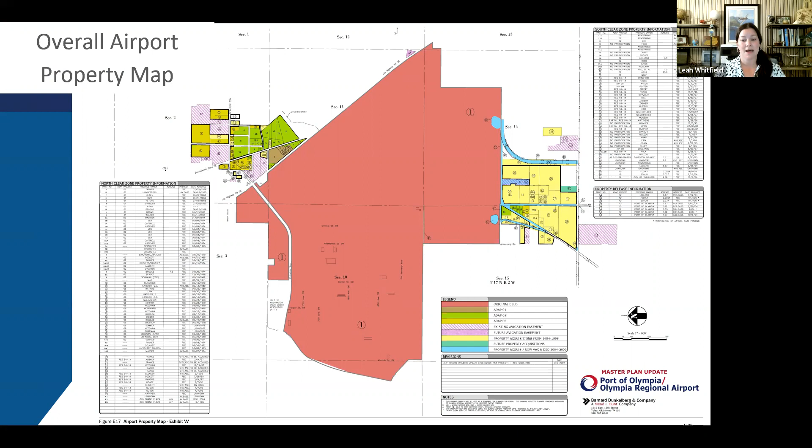So from a big picture perspective, this is the airport's property. This is the airport property map from the last airport layout plan, and any of the areas shaded in any of these colors are owned by the airport. So the overall property boundary includes all of this land. However, as you'll see on the next slide, we're really only focusing on a portion of that.

And so if you look at the screen, it's outlined in red. This is pretty much from, so at the bottom of your screen is the west side of the airport. And that's Newmarket Street. So we're looking at Newmarket to the east. So while the area that the port owns, or the airport owns, to the west of Newmarket Street is very important to the overall self-sufficiency of the airport, the airport master plan is really focused more on the airport proper, so the actual airfield and the surrounding land that supports the airport and those aviation operations. So just wanted to give you that focus area of where we're talking, so that way you're not curious as to why we didn't come up with a development concept for more of that Newmarket area.

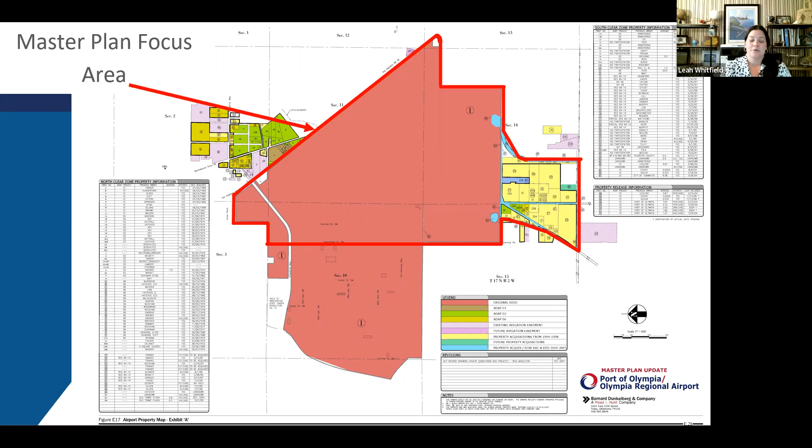So the next slide really shows the overall existing airport layout plan. This is the development plan that came out of the last airport master plan. And there's a few key colors, and I wanted to point those colors out because we tried to keep that same color scheme in our development concepts, and we'll keep that same color scheme in the new airport layout plan that will result from this project. So that way there's just some consistency when you're looking at the old study versus the new study.

So you kind of have that grayish color for aviation related industrial, or ARI. And then you have kind of all the other aviation specific development, whether it's corporate aviation, general aviation, commercial aviation, et cetera, in that pinkish reddish color that Darren is highlighting there. So we tried to carry that forward. And again, this just kind of shows you the area of impact that we're really looking at for development concepts, whether it's on the airfield or immediately surrounding the airfield.

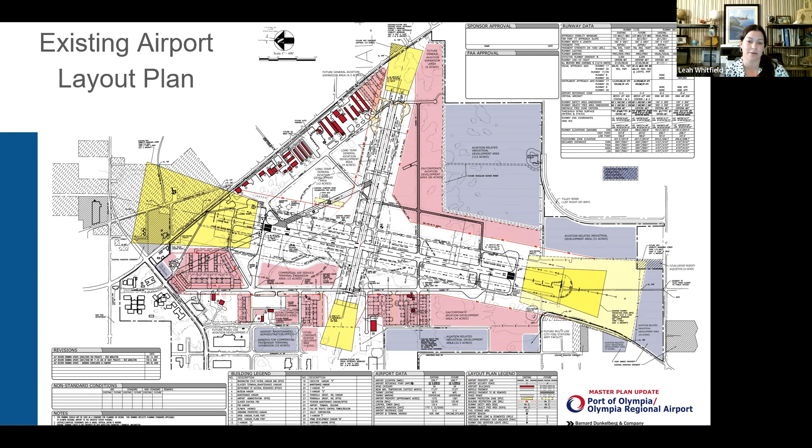So overall airport master plan goals that I just kind of wanted to reiterate. The first master plan goal, of course, is to meet aviation demand.

That's the demand established by the aviation forecast that was formally approved by the FAA earlier this year, but also any demand that might be in the future that's not necessarily in that forecast. When we do an aviation forecast, there are certain guidelines we have to follow that the FAA prescribes, so we can't always have this very elaborate forecast. We do know that there's a lot of pent-up demand in the region that isn't necessarily accounted for in that aviation forecast, so we want to be mindful of that when we're looking at alternatives, that we want to meet that overall aviation demand, both now, 5 years, 10, 20, 40 years down the road.

Of course, we need to meet FAA design standards. That's critical in order for the airport to receive federal funding, we have to meet those FAA design standards. That doesn't mean we need to go out and rebuild a taxiway right now if the fillets or the angle of the taxiway does not meet the FAA design standard as it stands right now. Design standards are constantly evolving, the FAA changes them over time, so that taxiway might have been built to a different FAA design standard. But that's one of the reasons we do master plans, is just to evaluate the current standards against what exists at the airport infrastructure-wise. So we just want to make that plan so that the next time that taxiway needs to get rehabilitated, we incorporate that new design standard, whether it's for fillets or the angle of the taxiway.

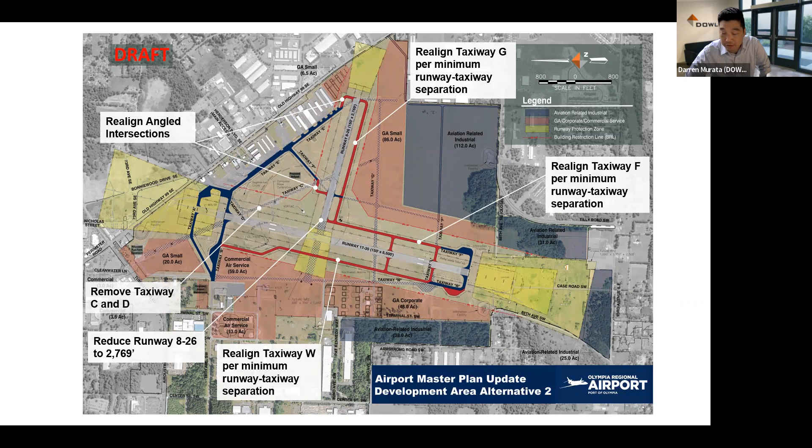In terms of development area, this increases to about 445 acres of potential area, primarily in this area and this area, whereas in alternative one that's still used up by existing taxiway pavement. So with this alternative there's obviously a lot more construction, but you get a lot more potential area you could use to develop if the need arises.

So next is alternative three. I'll go back and forth one more time so you can see - this is alternative two, and this is alternative three. It's pretty similar to alternative two; the difference is shown on this next slide.

This alternative adds a parallel taxiway on this side of the runway, which opens up some additional development area here. Other than that, it's very similar to alternate two, except that we keep the crosswind runway at its current length - this doesn't include a reduction in the crosswind runway length, and you can see how that affects this area here.

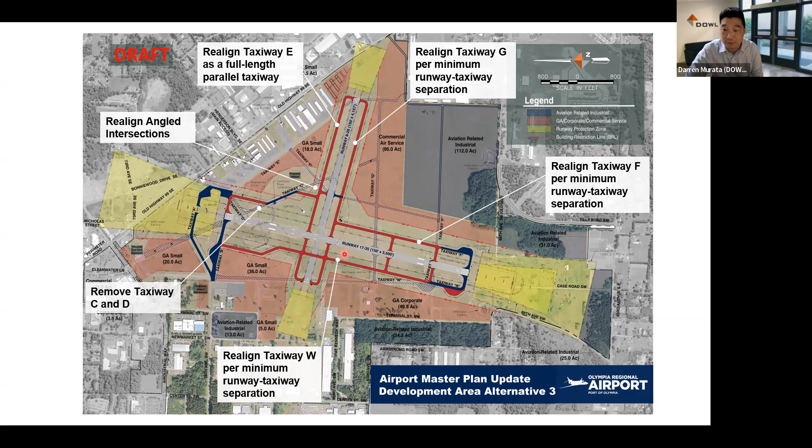Other than that, most of the taxiway system is very similar to what was shown in alternate two. As far as developable area, here at 443 acres, it's really pretty close to alternate two, where you have a little bit less here, but you do add this area here.

The other change between this option and the previous alternates: in both alternate 1 and 2, we show commercial service on this side and general aviation small on this side. This option just flips the two - so we have commercial air service on the southeast side of the airport, and additional general aviation small here on the west side.

So that's the 3 alternatives. This next slide shows just a summary. You can see the split between the various categories is roughly the same. What's really different in alternatives 2 and 3 versus 1 is you just get a lot more developable area, which is a result of bringing your taxiways in to the minimum separation distance. That really just creates a lot more opportunity for developable area.

Next, I'm going to turn it back to Leah to talk about the differences between the 3. Sure. Before we do that, are there any questions on any of the 3 alternatives? Is there anything that you thought should have been in the 3 alternatives that isn't? Or any questions just to get a better understanding of what's in 1, 2, or 3?

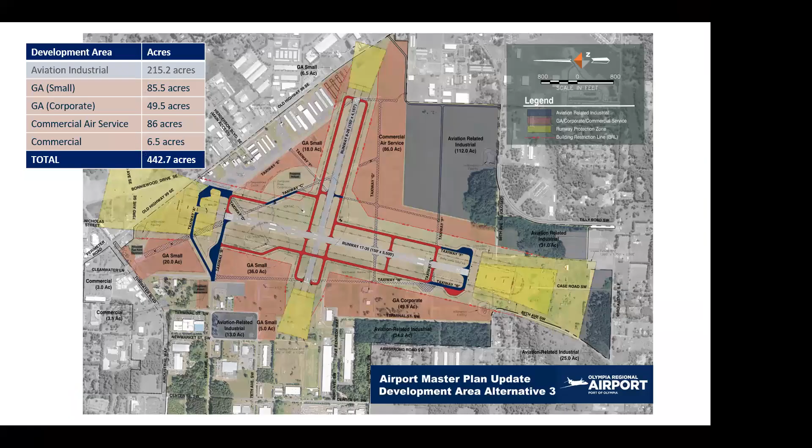Is there anyone else? Oh, go ahead, Max. Yeah, I was just gonna say, is there any thoughts — I see Jeff's comment about the terminal, whether it be a GA terminal or a passenger terminal, and the access to the road network — looking at alternative 3, seeing it over there paralleling 8-26, I'd just be curious what the thought process was moving it over. Moving it to that GA small area, and keeping that east side of the airport GA, then having the terminal area on that side of things, to keep the road access in mind.

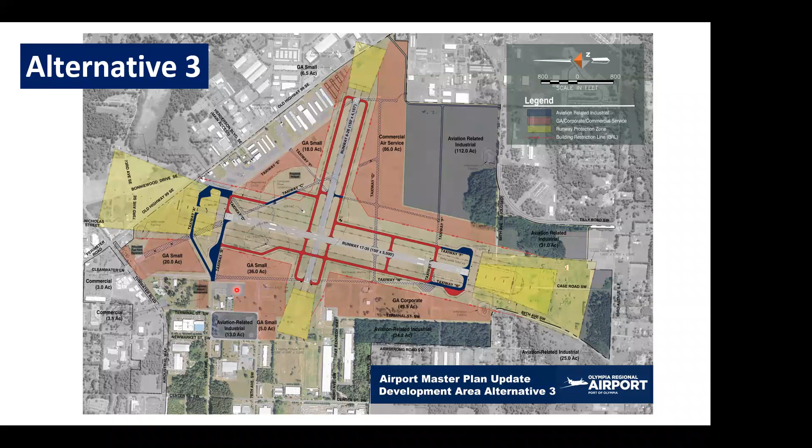Yeah, exactly. You've got all that residential right around there, and it's going to busy up really fast when you have people coming and going from the terminal. So, yeah, all in all, I like it.

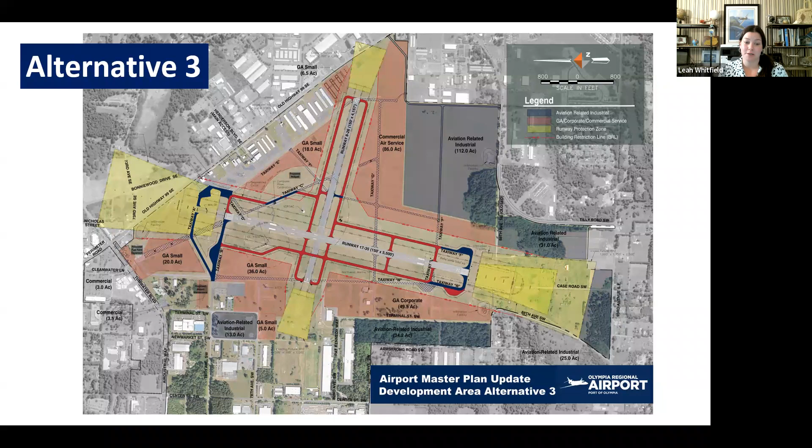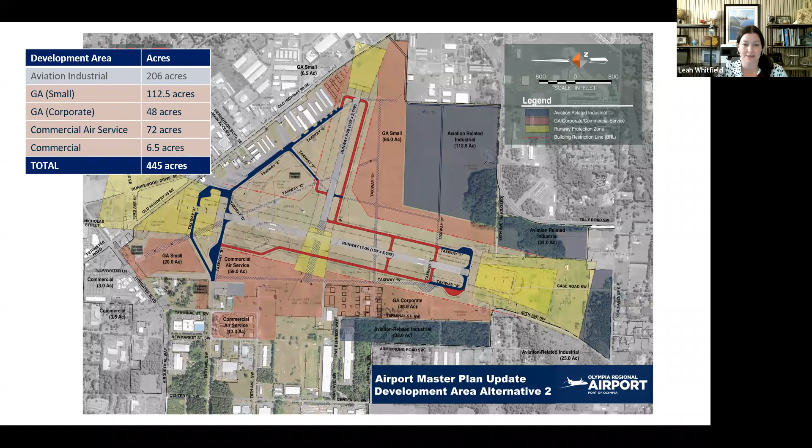If we were to keep commercial air service kind of reserved land where it's shown on the existing airport layout plan, and keeping that GA to the east side, so everything GA over there, and everything bigger on the west side. But looking at this one, you see kind of general aviation corporate, more like box hangars versus T hangars, for anybody who would need landside access and airside access, like an avionics shop or FBO, or any of those commercial operators. So we kind of tried to think through small general aviation versus more of the corporate aviation that might be jet traffic.

And then I don't think, Darren, I'm sure you probably touched on it, but the proposed helipad as well. There's been some conversations about that, where the old airport layout plan has it, it's not necessarily in a great spot. If someone lands out there, they're hiking across the field and down into the ditch to get to the FBO. So from a helicopter operation perspective, I'd love to hear any feedback anyone in the group has, whether it's that helipad or just general impacts to helicopter operations. There might not be any, but if you think of helicopter operation impacts, that would be good to consider too.

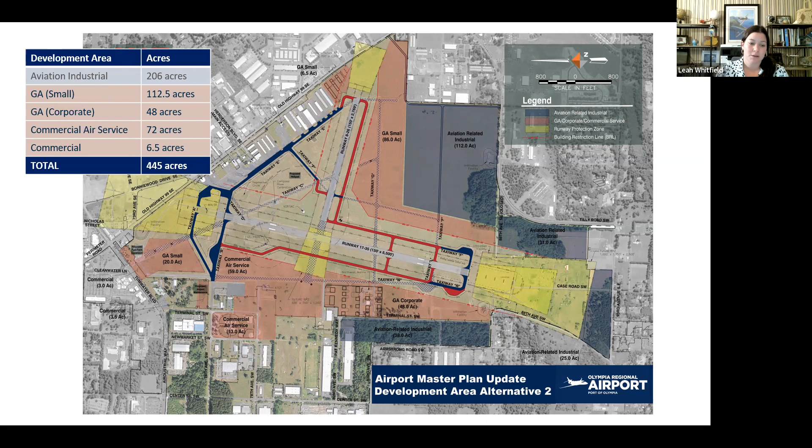Okay, well, kind of where we go from here, I'm going to go to the next steps. We're again kind of wrapping up the solutions phase of the master plan update over the next few months. So we have our draft alternatives, we're going to go into an alternative evaluation and then really start that environmental review.

We have some sub-consultants on our team that we've been starting to engage. Renee has in recent months, SWCA being the main one, looking at the criteria, making sure we're incorporating and aligning ourselves with the habitat conservation plan. We plan on hopefully presenting these alternatives to the public in early 2022, and then scheduling a technical advisory committee meeting with you as well. We also hope to present to the Port Commission early 2022. And then we'll get into that implementation, which is really where we'll start to look at how development is phased.

Obviously, we're not going to take the approach of let's build it and hope that they come. But we just want to make sure that the airport has that capital improvement plan, especially when it comes to pavement maintenance, making sure our pavement remains in good condition for the operators at the airport.

As the habitat conservation plan wraps up later in 2022, a year from now, that will determine how any development at the airport can take place. We hope in the implementation plan to take what the HCP has and incorporate that into the master plan, coming up with almost like instructions or a checklist. If someone comes to the airport and wants to develop a hangar, here are the steps you have to go through in order to do so.